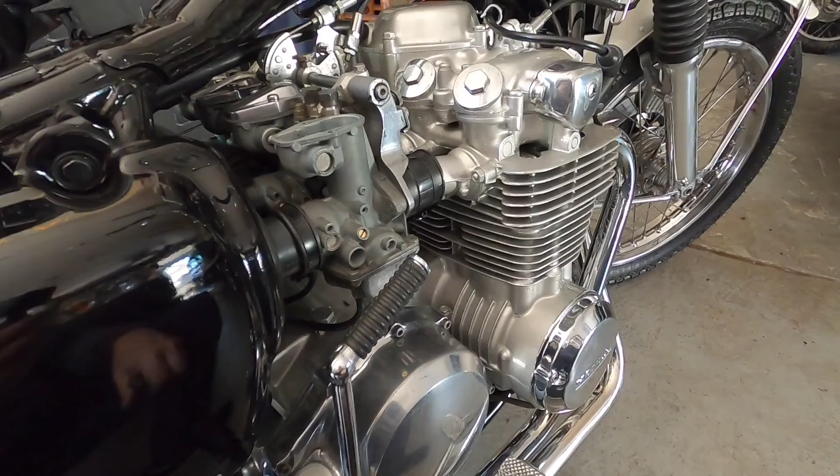Well, I've been working on the bike trying to get it going good. I put a new points condenser in, set the gap, set the timing spot on, and checked the centrifugal advance for proper advance. It's advancing correctly for the RPMs.

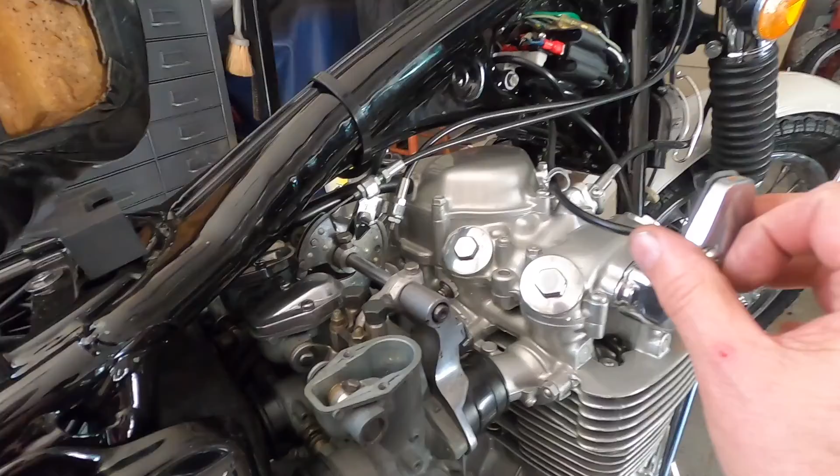It's just running too rich and it's stalling because of it. When I come to stops and stuff and just cruising along, it's blowing black smoke and running rich.

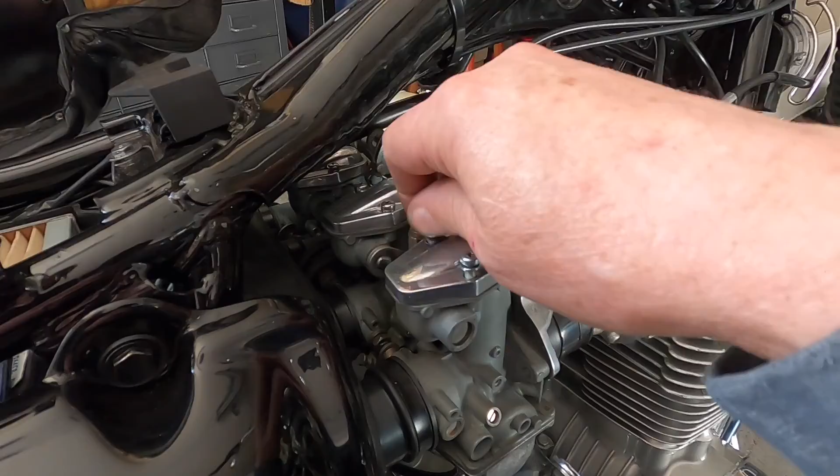So I figured out you can change these metering rods without pulling the carburetors. So that's what I'm doing. I just changed this one, lowered the rod one notch. I'm going to do them one notch at a time and hopefully get the engine running somewhat good so I can ride the bike.

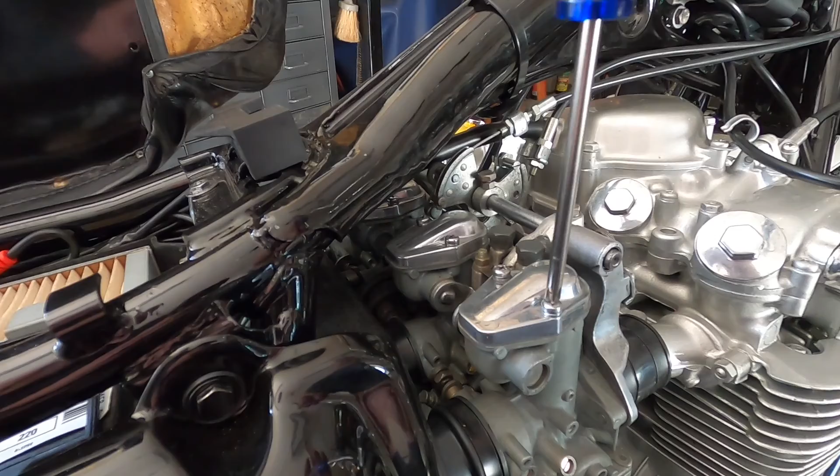I mean, I can ride it, but my problem is it just stalls when I come to stops, and it doesn't run good cruising at low speeds, and doesn't backfire or anything. It doesn't seem to be running lean. It seems to be running rich. So that's where I'm at.

So we'll just go carb by carb. Hopefully I can get this out with the frame there. May have to get a different screwdriver for that screw.

Let's see, I got a little ratcheting one here. Let's see if this one fits in there.

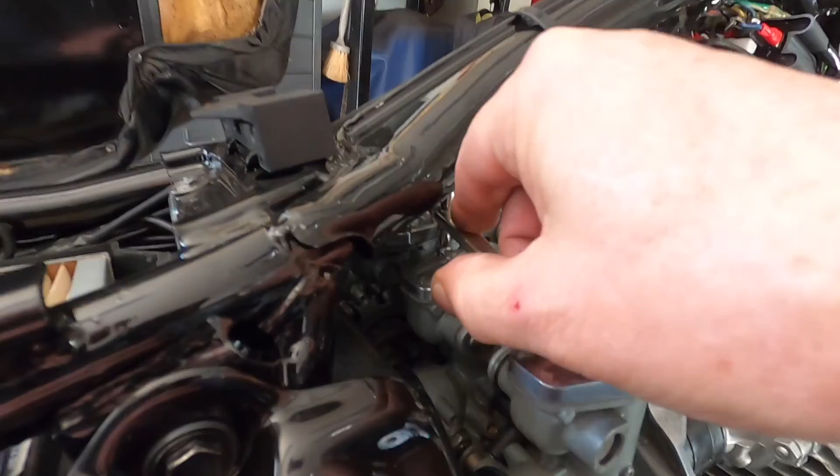We're just going to plug away at it and see if I can lower all these down, one click at a time, and then we'll start the engine and see how it runs, and hopefully it eventually runs good, and I can get this thing to where I can ride it.

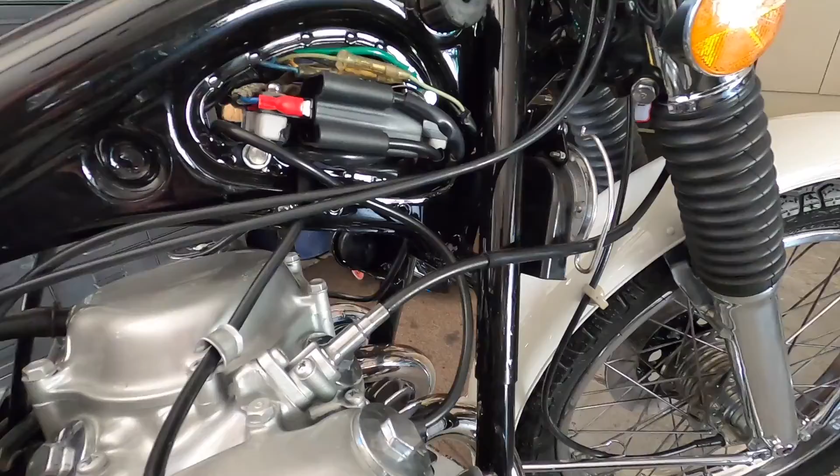It's not ignition, like I say. The points, the coils are new, the plug wires are new, the plug ends are new, the plugs are new. It's firing on all four.

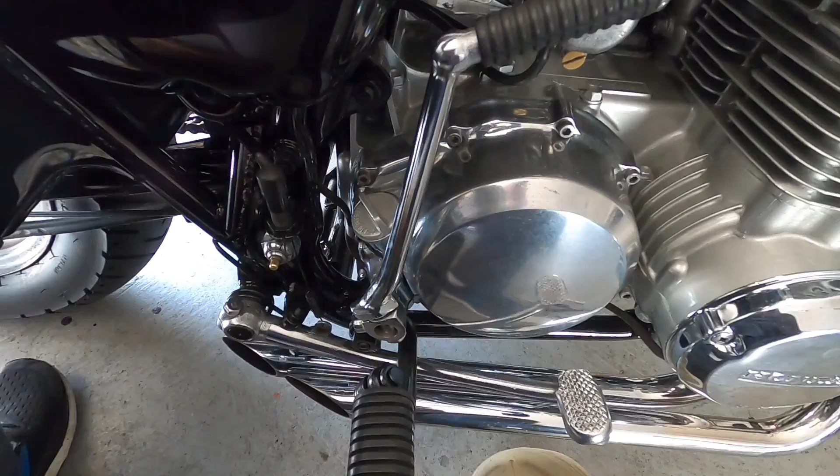Does sound like it's missing a little out of the exhaust, but I think that's because it's running rich. You give it some throttle, it really blows black smoke, so that's why I'm thinking I got to adjust it.

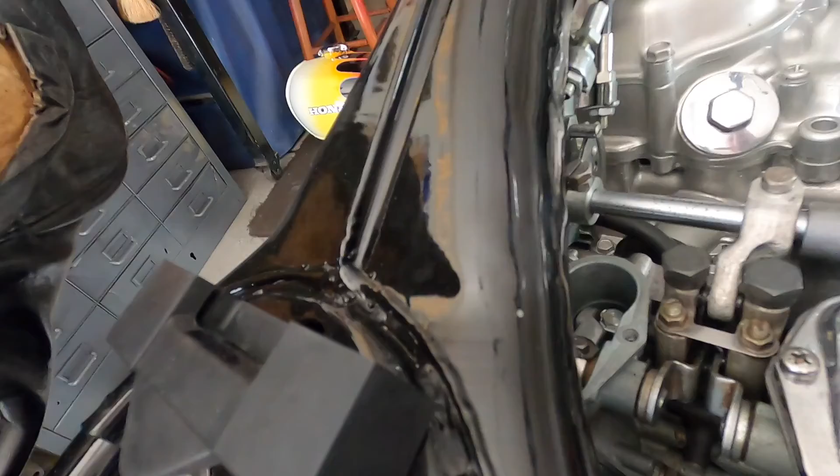Then I can undo it, I gotta bend these little tabs. Oops, I have a magnet here that's sticking to everything. So I bend those little tabs back out so I can get a socket on the nut.

Might need to get a little tiny screwdriver. Hang on, let's see if we can't get these bent back over.

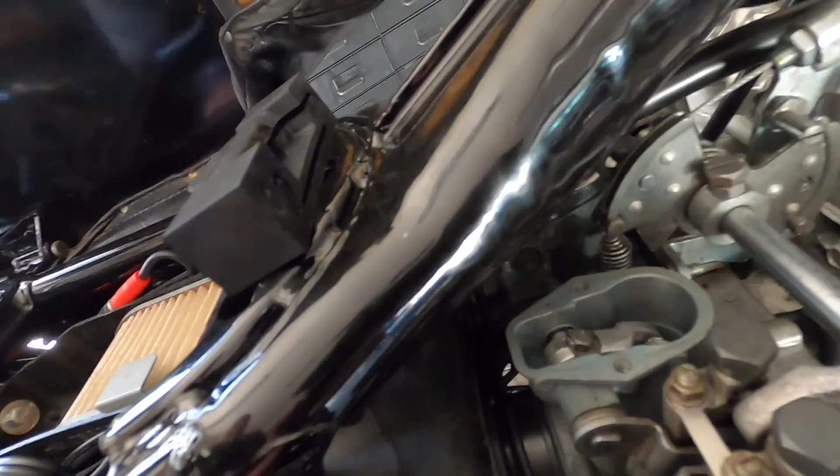And I'm not bending them back, I'm just leaving them open. Once I get everything, I think, to where I'm happy with it, then I'll go back and bend these tabs back up like that. I should have just left them when I put it together, but I thought it would be okay.

All right, let me just get that thing off. Hang on, I need both hands. I can't hold the camera and do it.

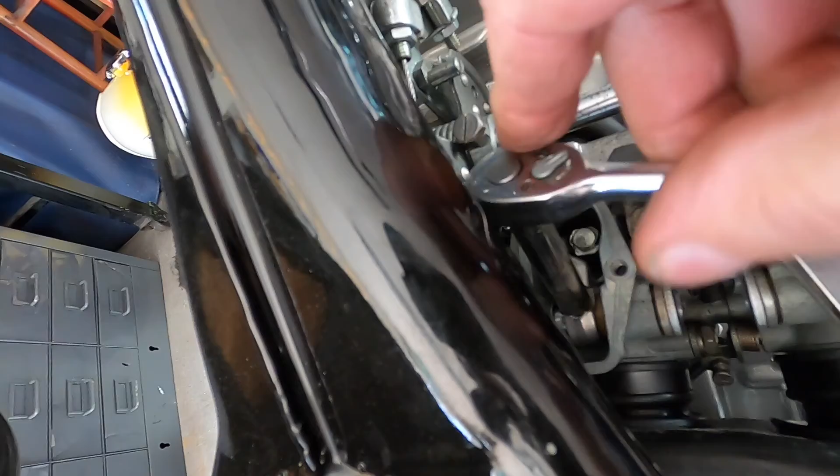All right, I get that little tab bent away, and then I can take this bolt out. This holds the arm to the throttle shaft.

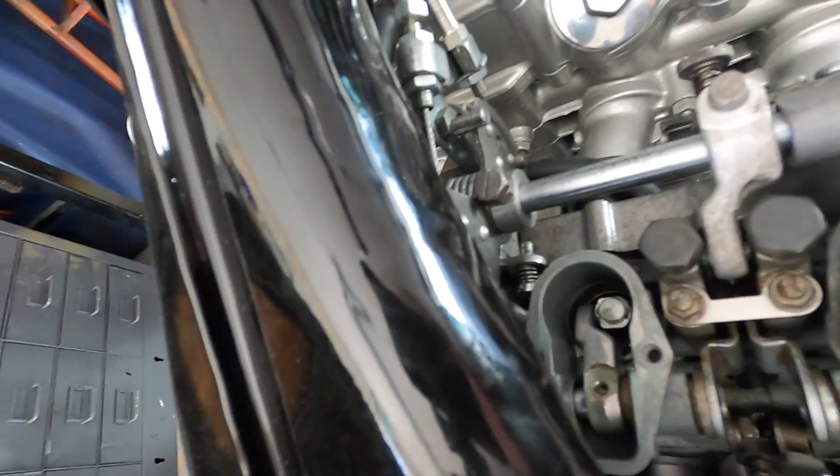And now that throttle shaft moves freely in there, as you can see. And I can pop this out after I loosen that, and then just lift this straight out. So let me bend those ears, get that loosened up, and then I can pop it off the shaft.

I might be able to pop it off without loosening. Yeah, there.

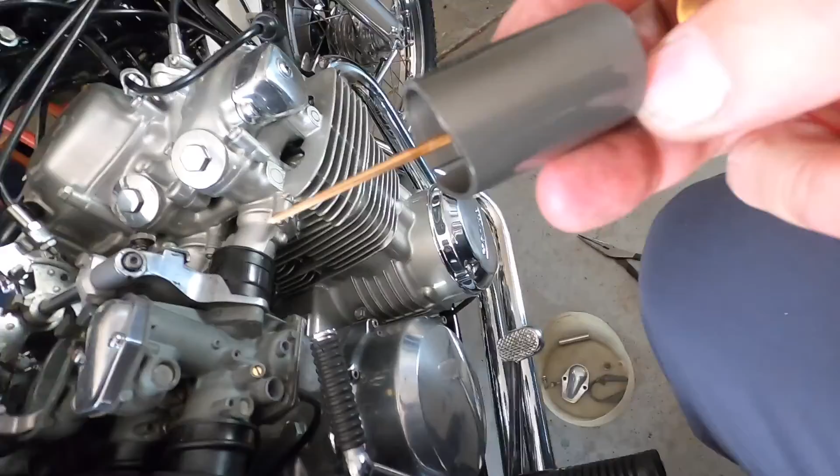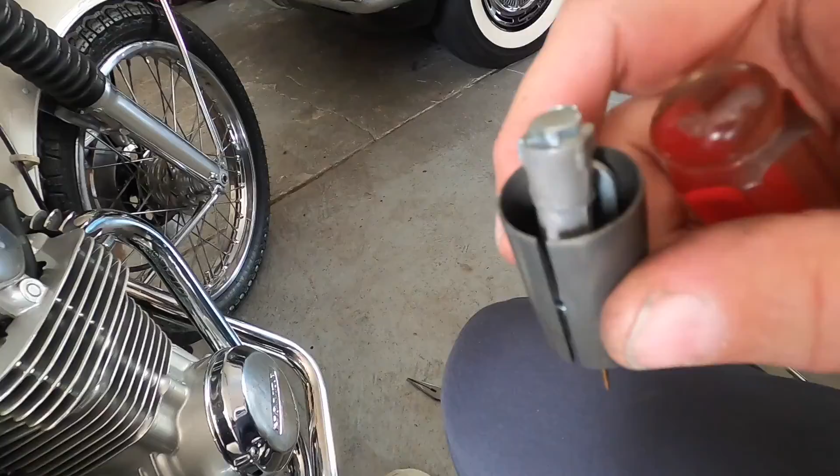So that's the rod I gotta lower. That's the metering rod, and there's two screws down in here you take out, and then you can turn this inner piece. I don't know if I can show it in the video or not. Let me go over to my bench and set the camera up on something here.

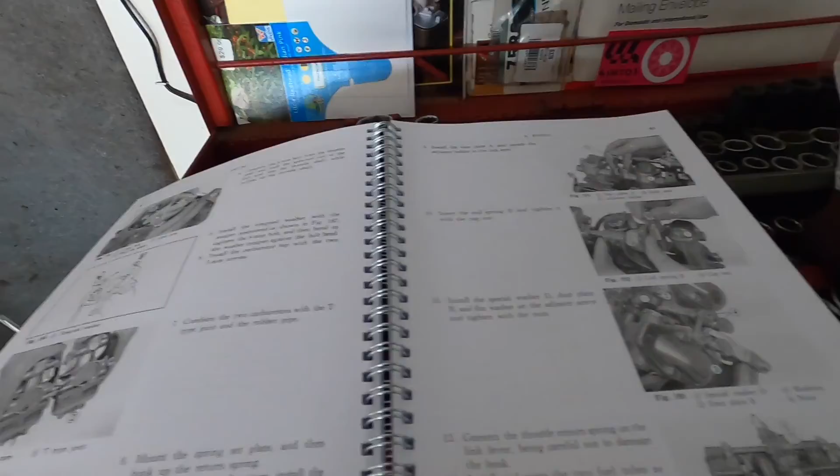I've been kind of keeping track of the numbers. That's the number, that's the throttle valve, correct number for the throttle valve. That's the number on the metering rod, I don't know if that's correct. The service manual doesn't really give you a lot, these are the only specs it gives you.

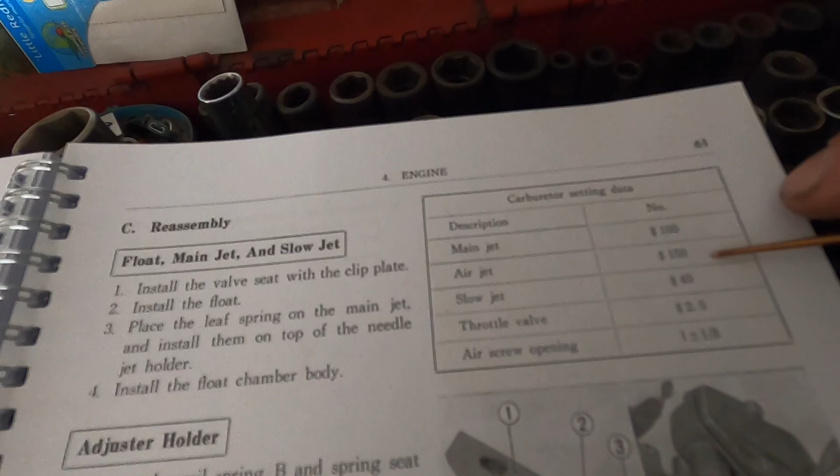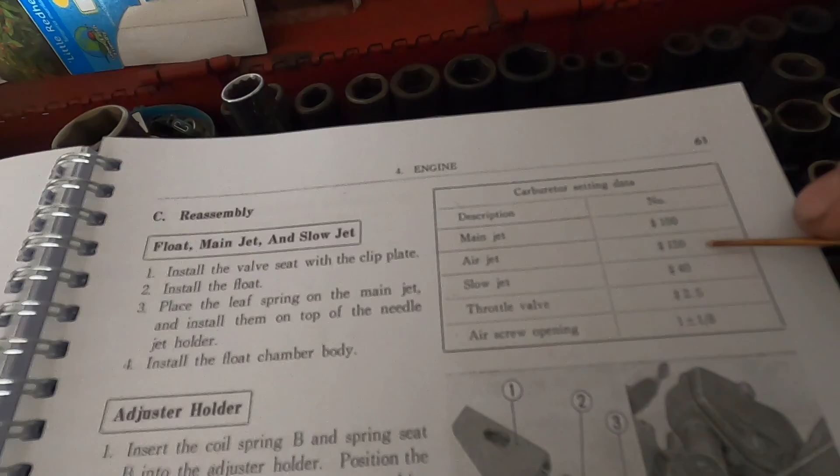So that's the main jet, which the bike has. The air jet, that's what the kit came with, that's what the carb kit came with. And it flooded out so bad, the air jet was, you could physically see, was larger, and these were slightly larger too. But it idles really nice with those jets changed out to the ones that were in the bike.

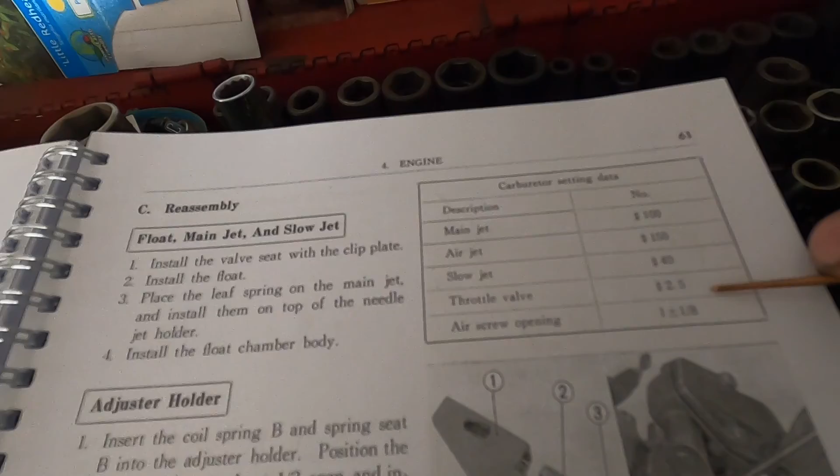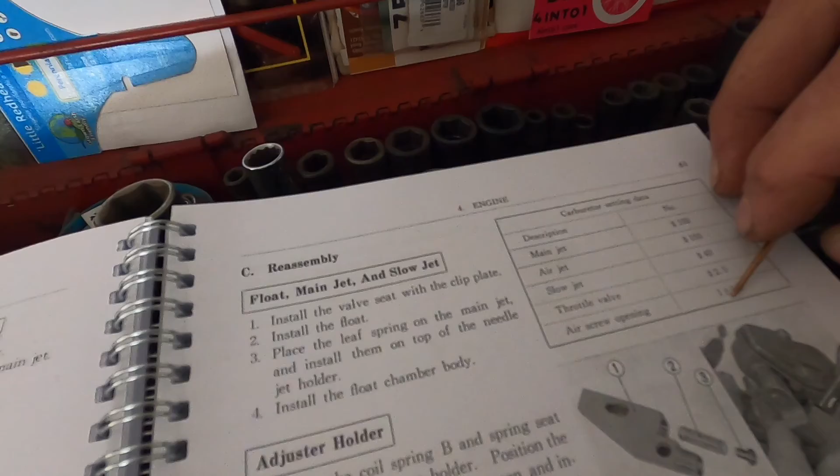That's a 2.5 throttle valve. That says 2.5 in there, so it's a correct throttle valve. And then it gives you the screw opening, which is the screw in the carburetor, which I had at 2.5, and it says 1 plus or minus an eighth.

So I don't know. Anyway, let me get these screws out and I'll show you what you do. Hang on. All right.

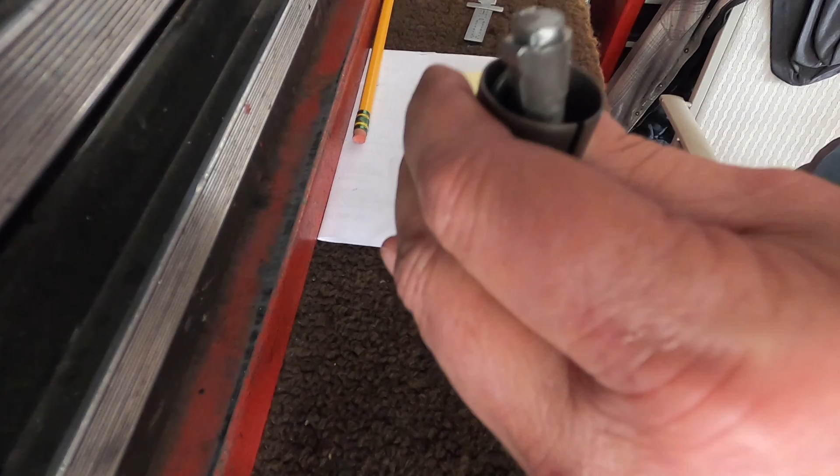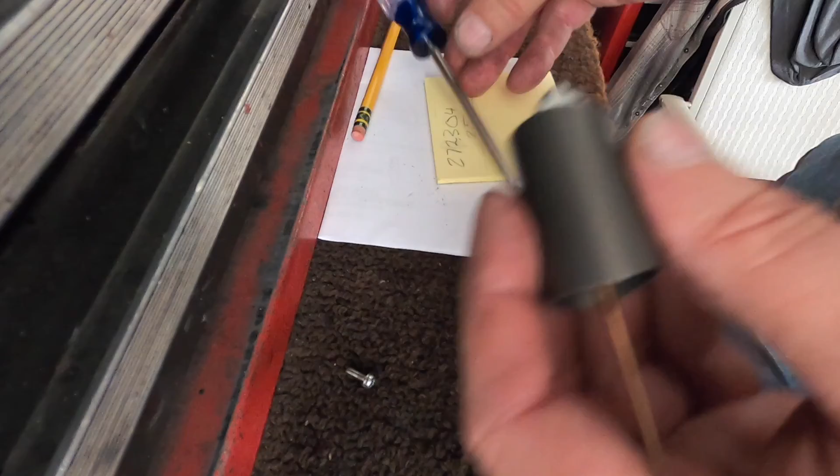Guess the screws aren't falling out. One of them's still hanging up in there. There we go, both screws are out.

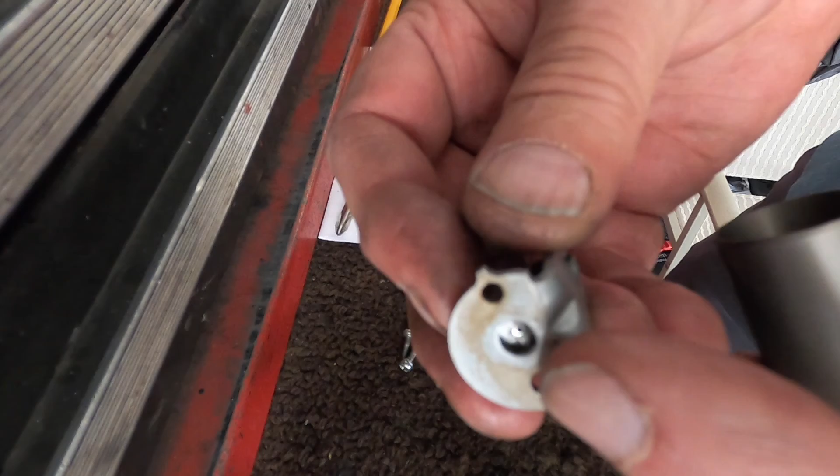And you turn this, see how it's got a groove there? You turn it until this little slot lines up with the groove, and then it comes out, and then you can take your metering rod out, and that's the clip.

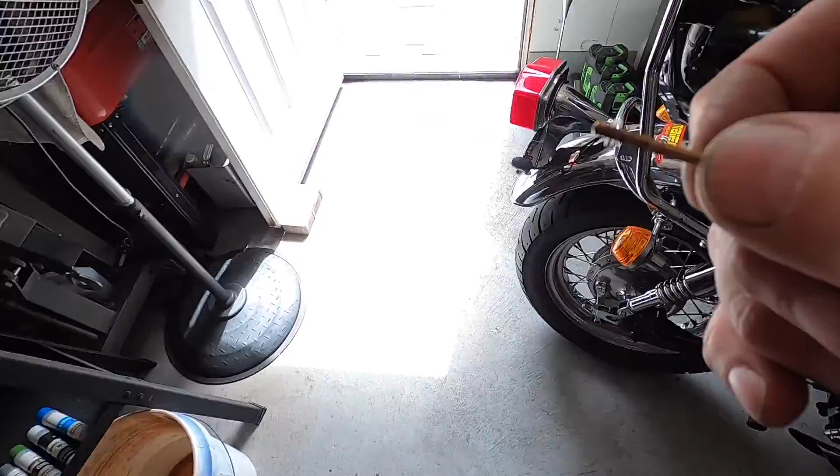I don't know if it shows up or not. Let me take it out in some light. That's the clip. There's a bunch of grooves on the metering rod. I don't know how that shows up, but it's in the next to bottom one, which is really rich, and I'm moving them up one notch at a time.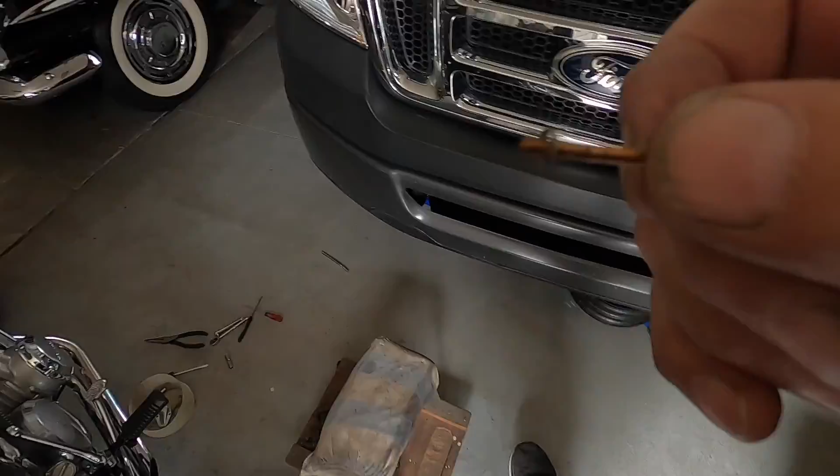I'm only going to go a little at a time, see if it improves the performance of the bike. And you know, I got to do something. If I turn the fuel valve off and let it sit there and run, after about 15 seconds it really runs nice. It shallows out the fuel level.

But anyway, I'm going to pop that clip off, raise it up one. I'm doing that to every one of the carburetors, and then we'll see how it runs again. See how that's one click down.

I don't know if you can see those numbers right there or not, but those are the numbers I'm looking at with a magnifying glass and writing down. Make sure all 4 of these metering rods are the same.

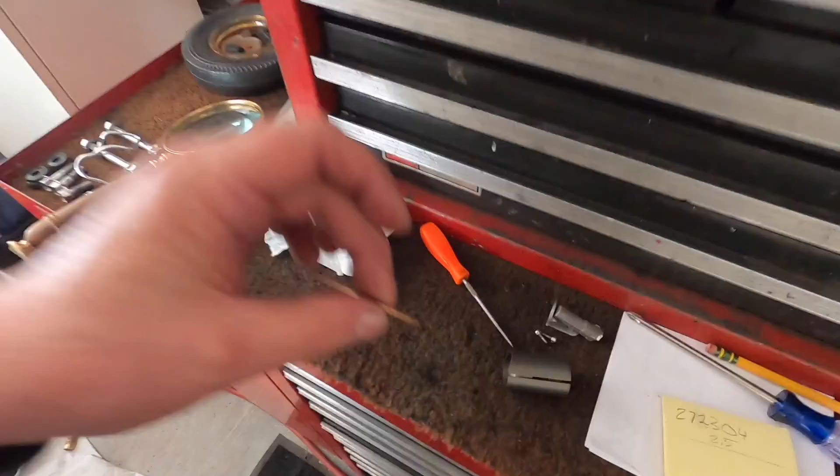Yeah, it'd be nice if they just put adjusting screws on the carburetor to where you could just turn them in or out to get the performance and not have to sit here and monkey around changing things like this to change the mixture, but that's just the way it is.

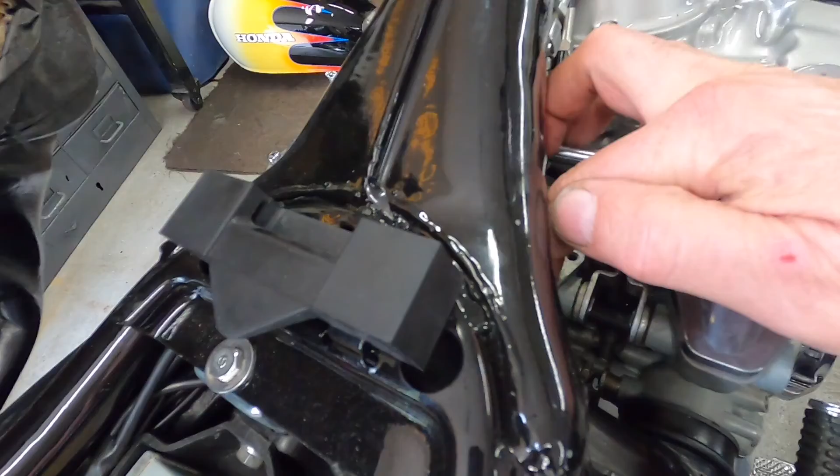Now I just dropped the metering rod back in. You can see I'm leaving those tabs pulled out until I get things right. I snugged up these, but I'm not going to run it a lot until, you know, I mean, I'll run it.

And if it doesn't run good, I'll take them back apart and change them again. If it runs worse, I'll go the other way. If it runs better but still not good, I'll go some more, but there's no point in keep bending those.

I'll fatigue it, so I'm just going to put the tops back on and we'll just try it out, and when we get it right, I'll pop the tops off and rebend these things. No big deal. Got another one done.

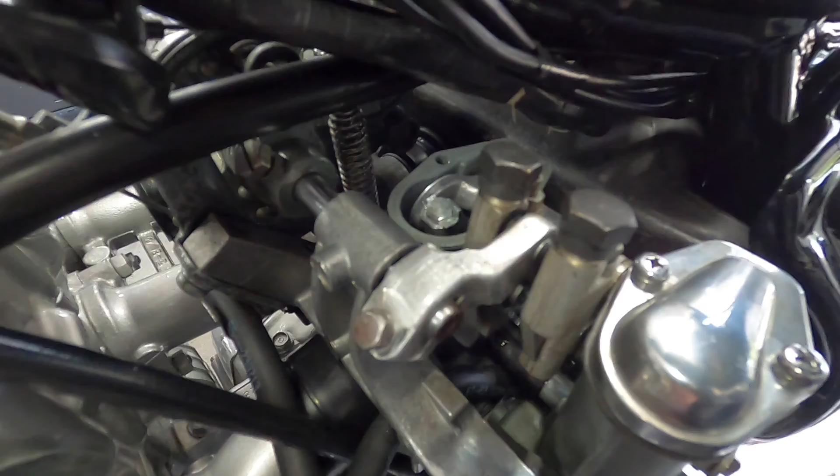Let me put the top on that carburetor and one more, and we're gonna test it out. It's kind of a pain to do this, but it sure beats having to take the carburetors off, that's for sure. All right, that's gonna drop down in there, so let me get this together.

I need both hands, and then we'll button this up, put the tank on, and see how it runs. It's starting to cool off, so I don't know if I'm gonna be able to go out and ride. It's getting cold out. It was warmer earlier when I went to take it out and found that it just didn't want to go, so doing the same thing.

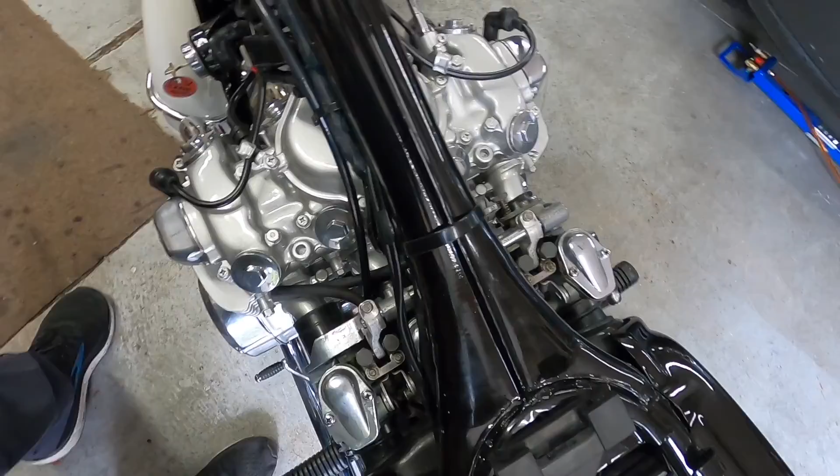So it wasn't the points condenser after all, I think it's all carburetion. All the metering rods are up one notch now, everyone's done. Wouldn't you think raising those rods would make it run more lean? But it's not, it's running way richer. I don't know if I did something.

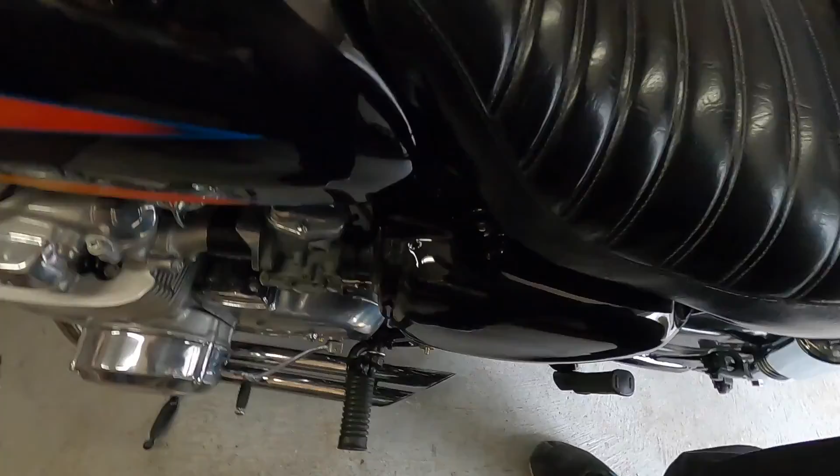See the black smoke coming out? I don't know.

And it just loads up more and more as it sits there and then eventually stalls. It definitely made it worse, whatever I did there. So I don't know, I'm kind of at a loss. Usually moving those rods down leans it out. Maybe I'll take it apart and put them all the way up and see what happens. It's a bit of work to do that, so that might happen another day.

Another thing I might do is shallow up the floats, because what really helps is when you turn the gas valve off and it runs a little bit.

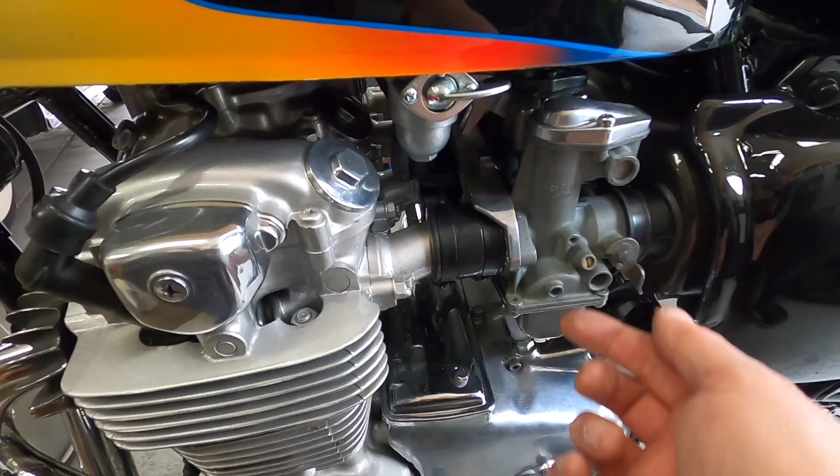And the float bowls are like 20 millimeters. They're supposed to be 22. I think I might take one of these out, put a clear hose on and hold it up and see how much fuel is actually in the bowl.

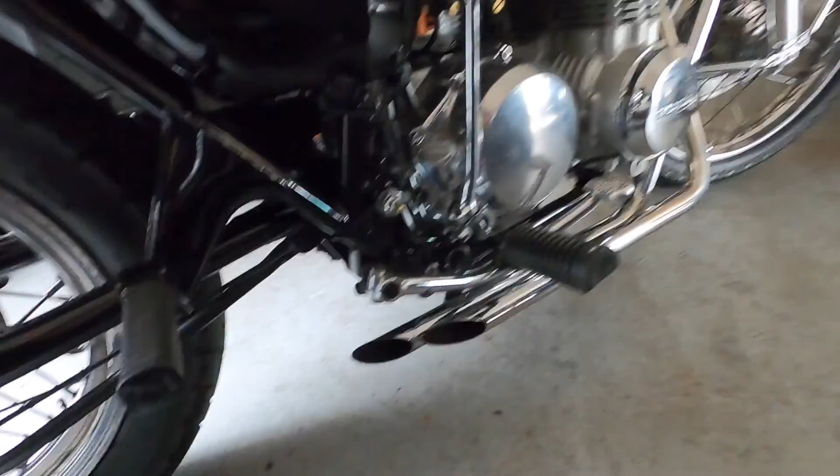I took it out for a ride on the road, and it's just completely dropping a cylinder here and there. It's like it's ignition. See, cylinders are picking up and dropping off right now. So I think I'm going to check voltages at the coil and just check everything, see if there's low voltage running somewhere.

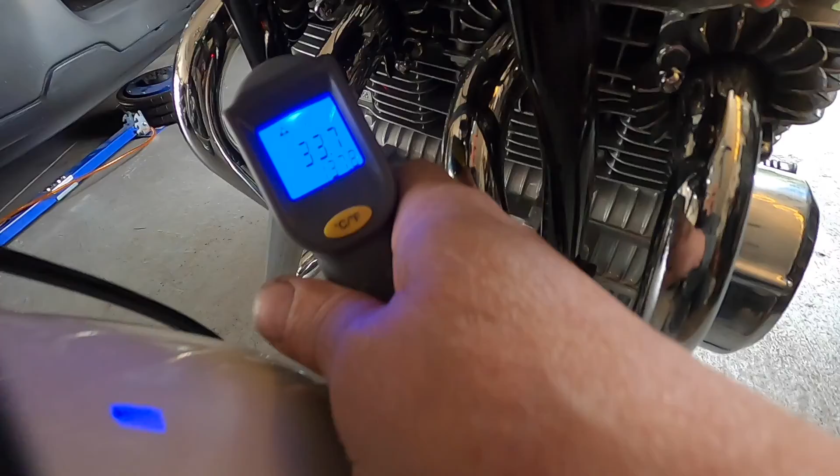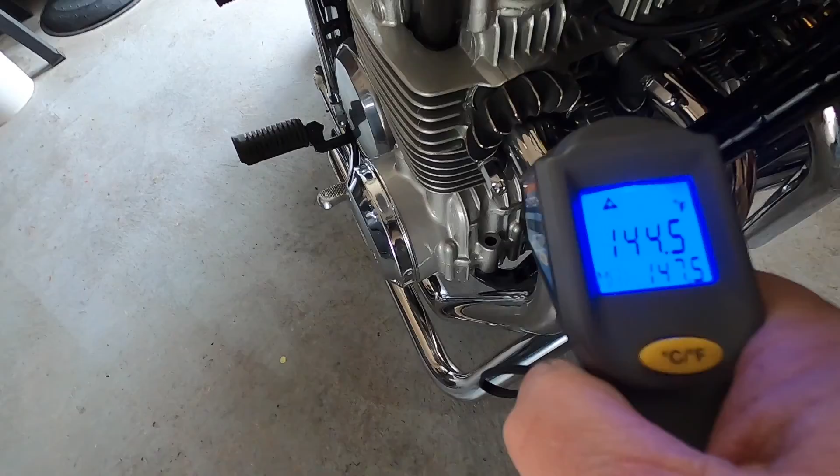Pretty close to the same temperature, but there's definitely an issue with, there's definitely a miss or something. You give it the gas, and I mean, you stab the throttle and this thing will absolutely get up and go, and it doesn't backfire when you decelerate.

And yeah, I'm thinking I'm going to start looking more at the ignition again before I do more carburetor work. I'm going to check voltage at the coils, make sure that I got 12 volts to the coils.

Make sure everything in the ignition circuit, and this grip, I don't know how many times I've glued this thing on, it just keeps coming loose. I used what everyone recommends, and this is what I used, but it doesn't work worth diddly. So I'll have to find something else that'll work on that.

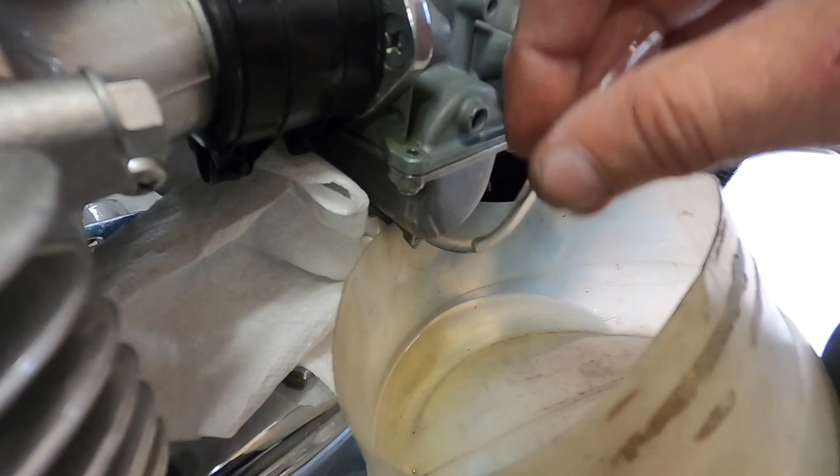I was trying to show how I check the float level. So you get the clear hose in there and turn the gas on, and it should be not higher than that joint.

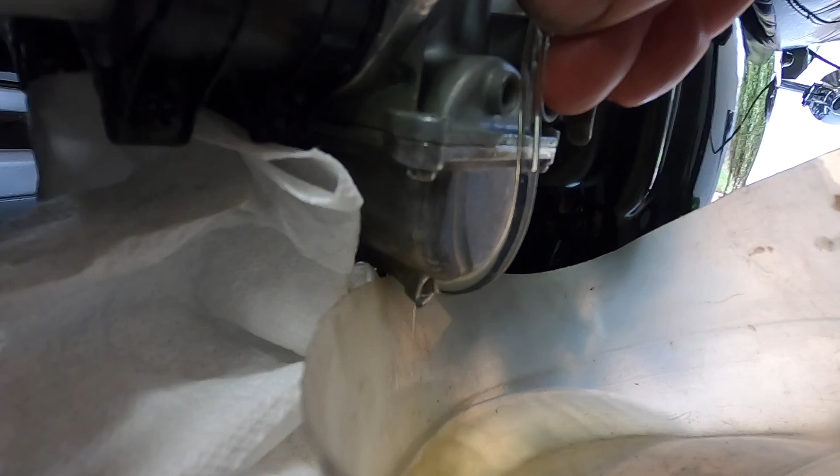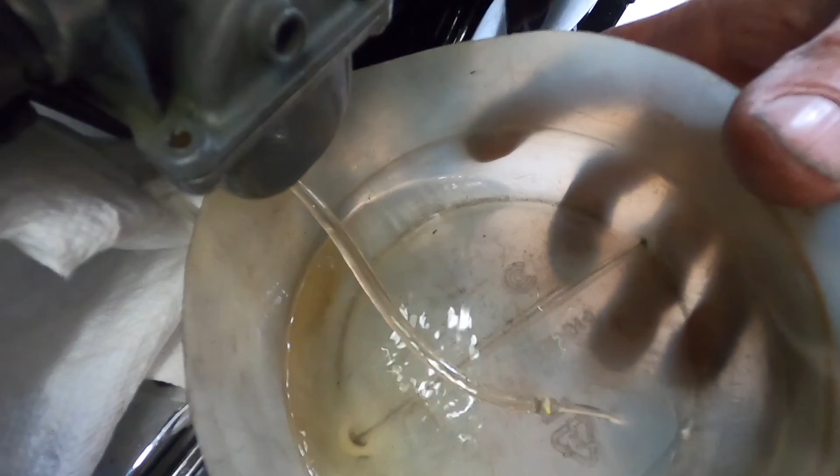So the float level is good. You see how I move it? It stays. The bike's leaning over a little bit on the kickstand, but yeah, I don't think that's out of the norm for a float level. I think that's all good. We'll let the fuel drain out before I move my dish here.

Alright, so I guess I'm going to check voltages. The battery's down a bit from all the cranking and starting it and stuff, so I got the battery on the charger right now.

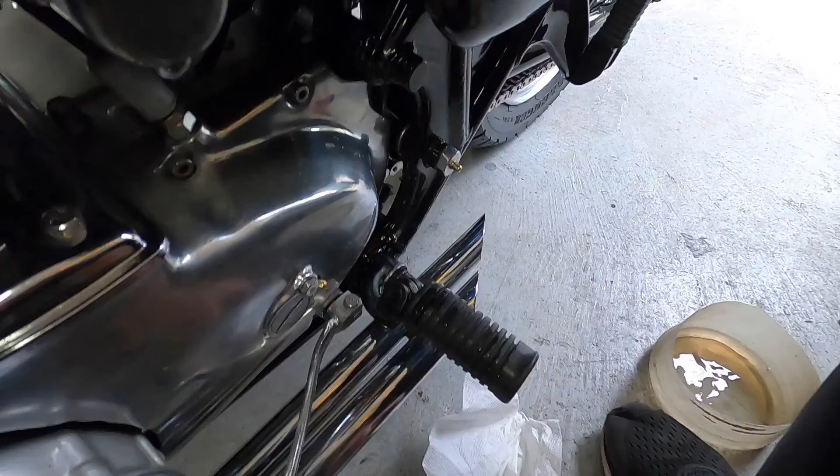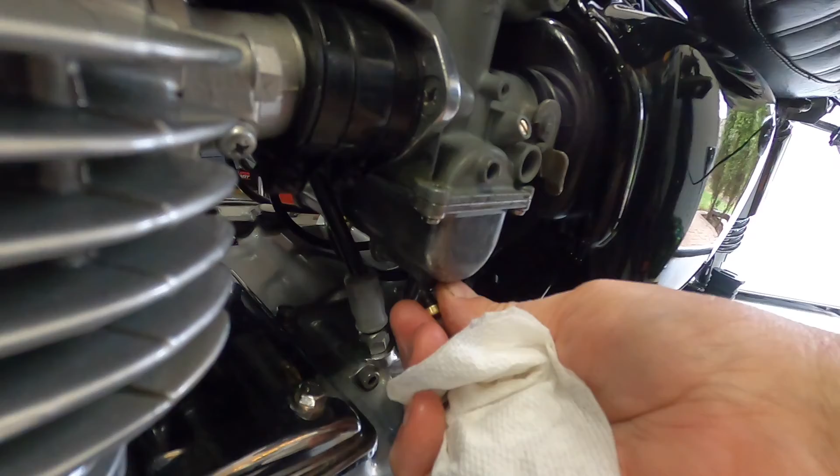But yeah, I don't think all the floats are set the same, but they all should be pretty good, like right in that area. So I don't think it's the float levels.

I don't know what I'm gonna do. Seems like the more I work on it, the worse it runs. And I might have to put those metering rods back to where they were, but first I want to check the ignition system out. It's like misfiring, dropping a cylinder, so I don't know what the deal is. We'll horse with it some more.

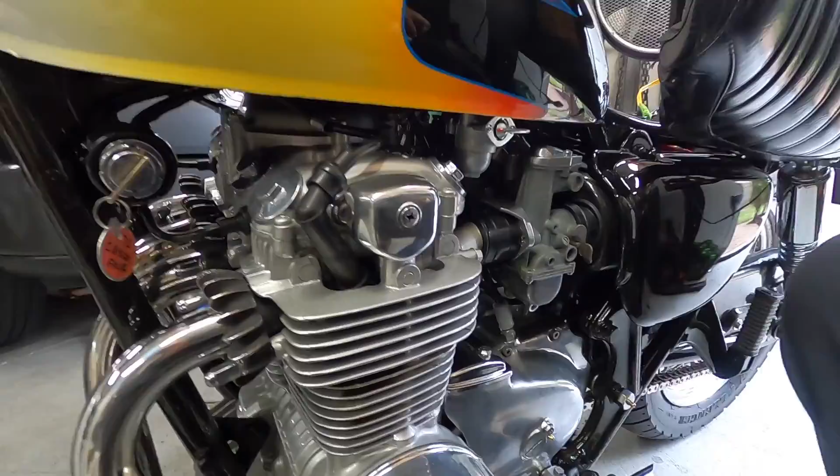So as I stated, I put new points in here because I felt like it was an ignition problem. It felt like cylinders were dropping off and picking up and dropping off and picking up. Usually when you have a carburetor issue, they either run rich or they run lean. They don't drop off and pick up, drop off and pick up.

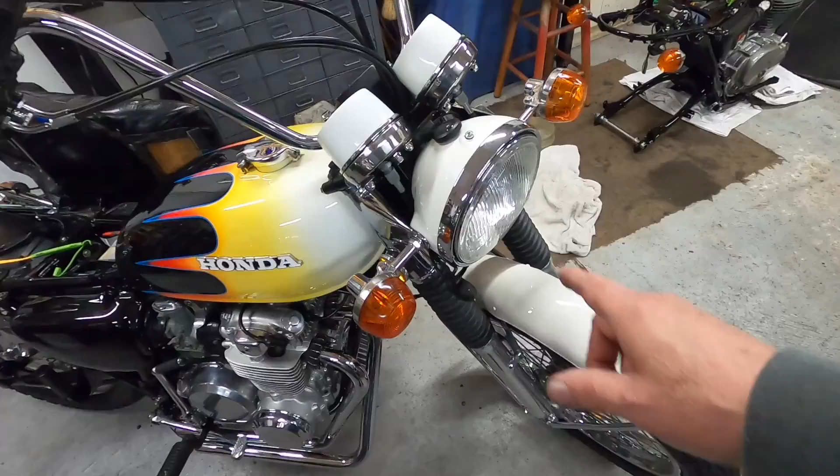That's why I put points and condenser in it, and it's doing exactly the same, actually a little bit worse, but the timing's right, everything's set perfect. It was running really good when I first started it with the points and was setting the timing. But as it was running, it was starting to run worse. And then when I took it out for the ride and I turned on the headlight, it really ran bad.

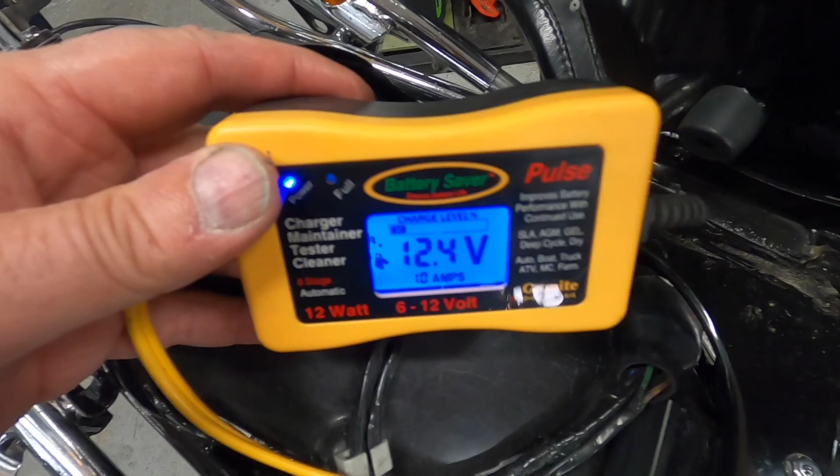So I'm wondering if it's a low battery that's causing it. Yeah, the battery is surprisingly down. It had 11 point some volts when I started charging it.

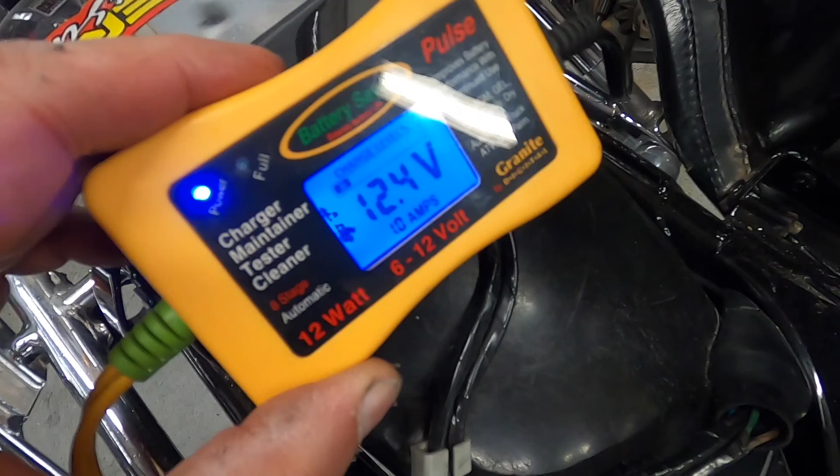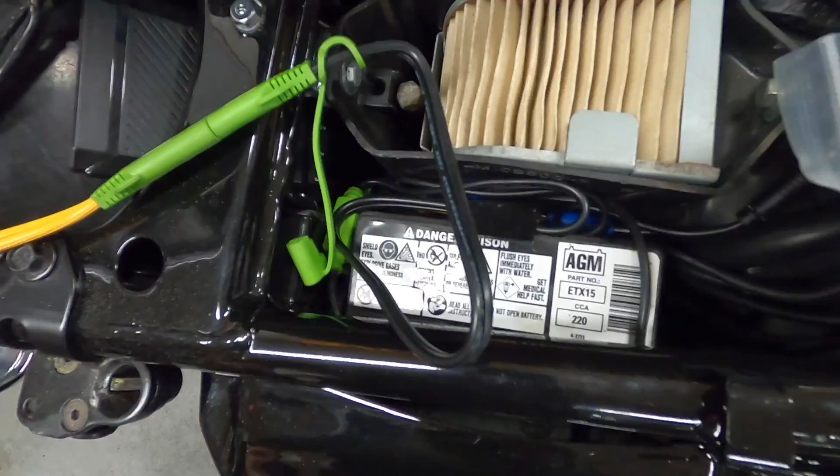Maybe the charging system isn't working on the bike, so I cranked it up, and yeah, it is charging. But I think it's because I haven't brought the battery up in quite a while, and it may be a bad battery - that's the battery that was in the bike when I bought it. So anyway, we'll charge the battery.

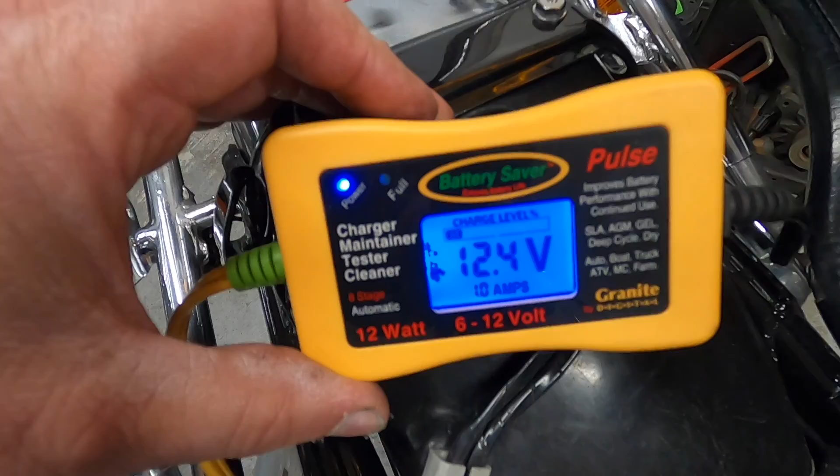I can't check voltage at the coils with a pretty low battery, so I'll let that charge overnight, and tomorrow I'll check voltages at the coil. We'll crank it up, and if it runs good with the battery fully charged, I'll check the charging system again. But if maybe the battery's no good, I don't know, but it definitely doesn't seem like a fuel problem.

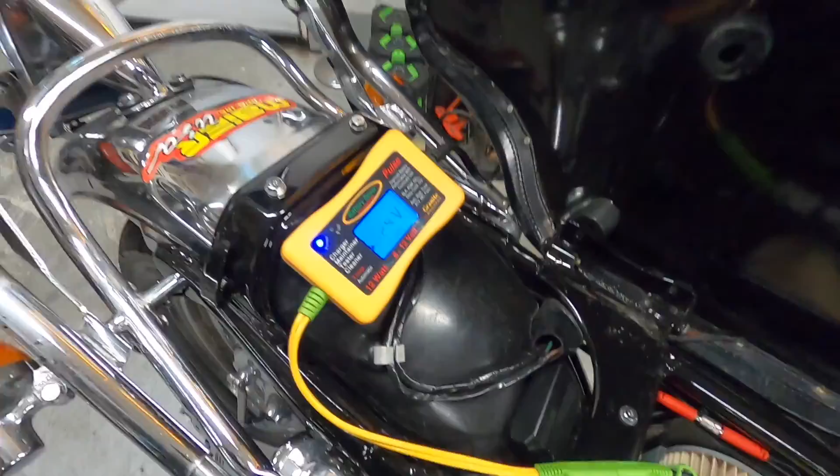It seems more like an ignition problem. It's still blowing black smoke out the exhaust a little bit, but that could be because of a weak spark or something too. So anyway, let me get the battery up, and we'll fiddle with it a little more and go from there.

I put a voltmeter - you can see the terminals there and there - and it was charging. It was like 12.8 volts when I was running at about 2,000 RPM, probably because of the amount. It's probably charging at its full. I think it's a 1.5 amp alternator, so it's probably charging at full output.

We'll get this all charged up. It's supposed to be cold tomorrow, so I probably won't get it out and ride it, but we'll get this charged up, and you'll see in the video I'll check the power to the coils and make sure, wiggle the wiring and everything to make sure there's no issues with the wiring on the bike, because with new points and condenser and the timing set with the timing light, everything's spot on.

Points are 14 thousandths. Timing is spot on, the F mark on both cylinders. I gave it the throttle, and the timing marks come to where they should for full advance at the correct RPM on the tach. I don't remember what it is now without looking in the shop manual, but it was spot on. So I'm pretty sure that all that ignition stuff is good.

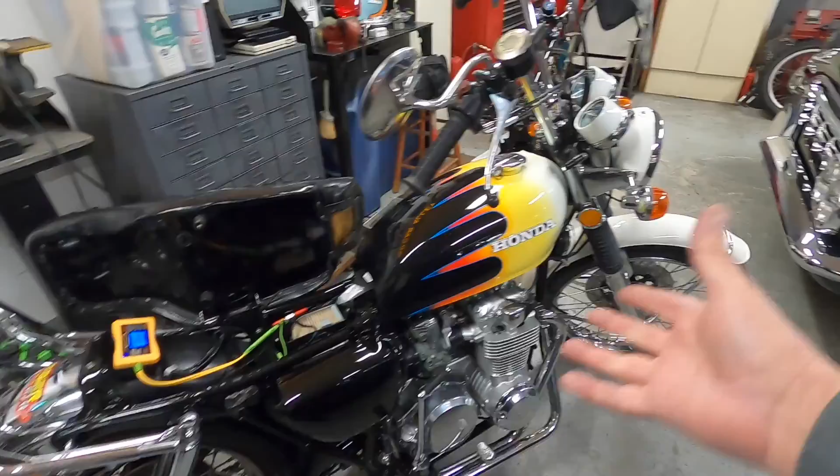I've been cranking it, and I put the camera on it and was working lights and doing all that stuff. So that probably ran the battery down a fair amount. And then I haven't really ridden it.

Really got to get the RPM up around, you know, preferably 3,000 RPM to get the charging system putting out its max. At idle, it's probably putting out nothing - probably draining the battery from the lights running at idle. So, you know, these bikes just have a 1.5 amp alternator, what can I say, and that's rated, I think, at 2,500 RPM. So it's going to take a bit of riding to keep the battery charged up.

And I've put now 2.5 miles on it. Somebody was giving me the business, and I only rode it 1 mile and 7/10, but it was wet and rainy and it wasn't running right.

I just wanted - you really can't just sit here and let it run in the garage or park. You need to put a load on the engine and run it a bit, so if it's loaded up from idling, it cleans it out. And you need to run them on the road to really tune them properly, or if you're lucky enough to have a dynamometer, which I definitely don't have.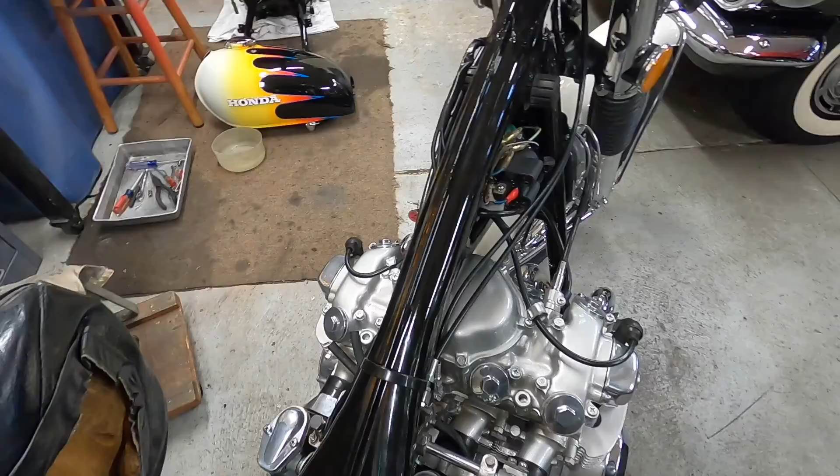It took overnight to charge the battery. It was really dead, but I just checked the voltage at both coils on the black with white, and they're both 10.36 volts, so there is a resistor. And I got 12.5 volts at the battery, so I'm assuming that it's a resistor.

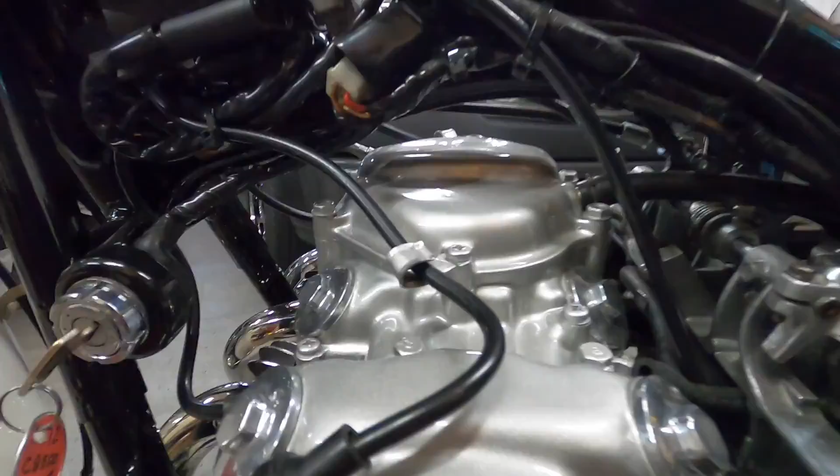I wiggled all the wiring to see if it would change, wiggled connectors and checked grounds and everything, and made sure the engine had no bad ground. I actually grounded the engine directly to the battery, and that made no difference. So I think we're just running a resistor through the system here to, I guess, help save the points. Well, it didn't make any difference.

Charging the battery.

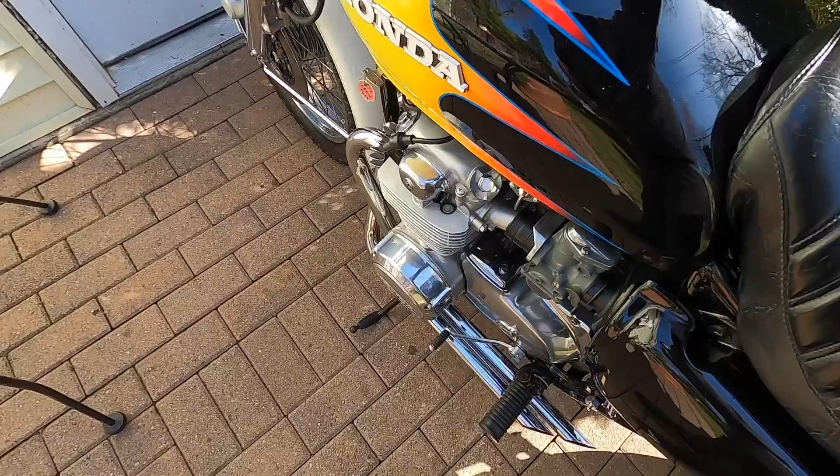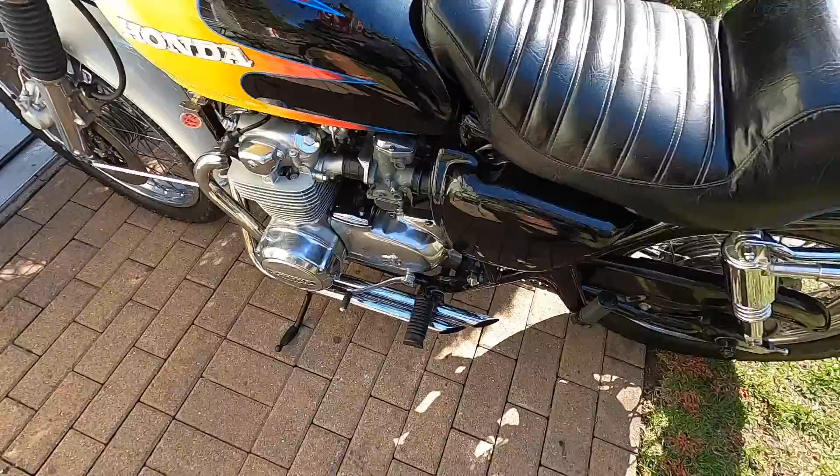I think I'll put those metering rods all the way the other way, one click so they're at the bottom. Try it, I have nothing to lose. It runs worse now than it did before I raised them up one click. So let me put them down and see what happens.

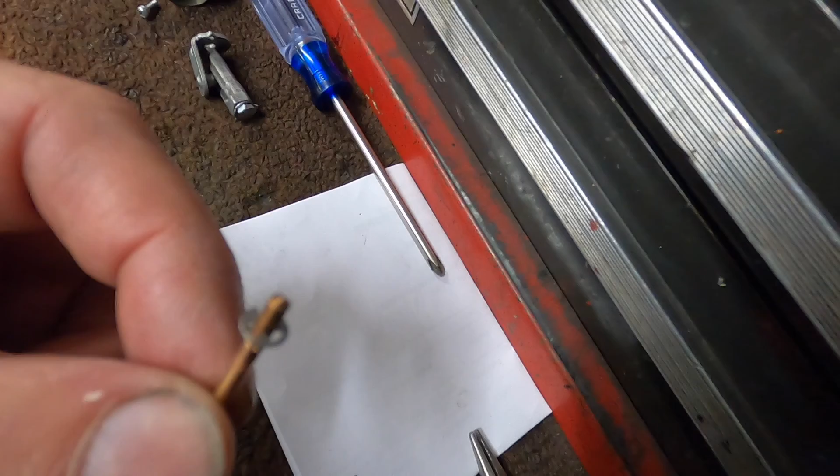Trying to hold this so you can see it, but I moved it the opposite way, so it was one click. When I just ran it, it was 2 clicks above the bottom where it is now, and it ran worse moving it up one, which lowers the rod down into the jet so it leans it out. Clipping it down further raises it up out of the jet so it richens it up.

It would have been much easier if they had a screw you could just turn to adjust the carburetors, wouldn't it? But they don't. So anyway, we're gonna try setting them all there and see if that improves the performance. If it doesn't, I'll put them back where they were.

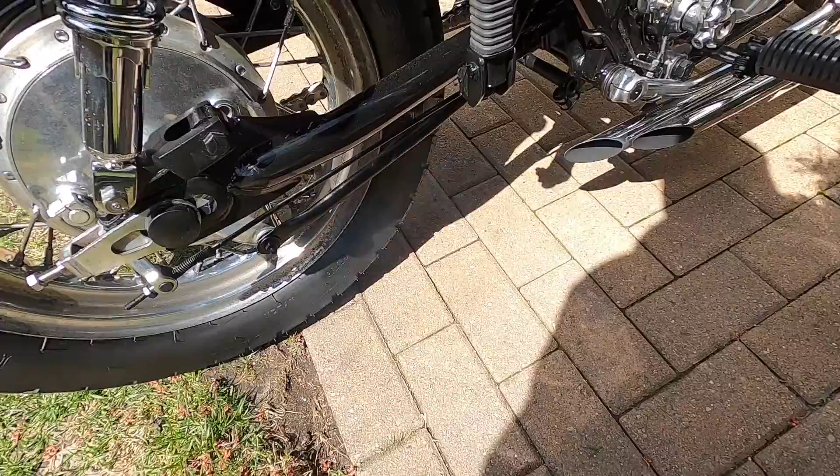Back to blowing black smoke now. I don't know if that shows up or not, but it's pretty black.

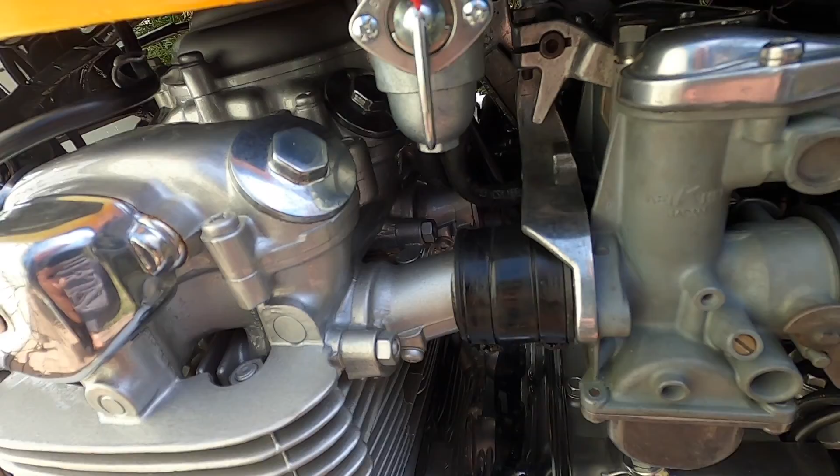And I checked for vacuum leaks. I took some WD-40 and sprayed it all around the manifolds here to see if I had a vacuum leak on both sides, and sprayed it around these, and no vacuum leaks appear to be anywhere. Sprayed it all around everything. So anyway, I'm gonna give up for now and do some yard work and fool with it another day.

Turn the gas off. As the carburetor is burning out, it starts running better, when it's starting to run out of gas.

It's definitely a fuel problem. It's not ignition, because when it was missing and stuff, I was putting my timing light on each wire and the light strobe was firing off fine each time.

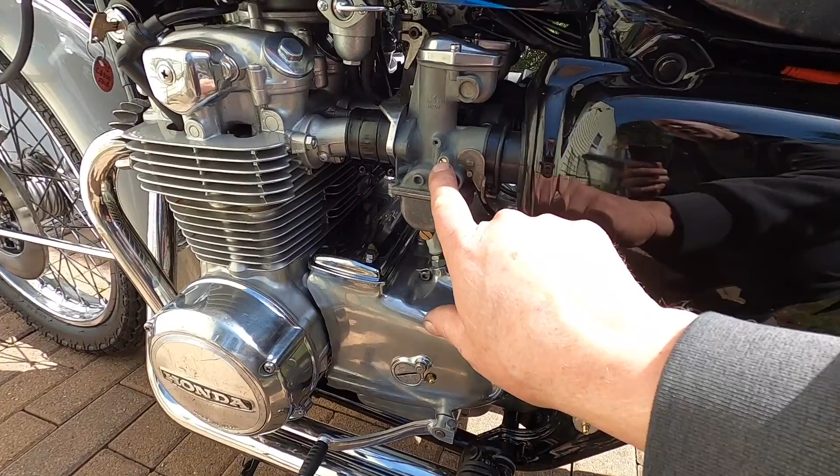So we've got a fuel system issue, and I don't know, these are the bigger air screws. Maybe I'll put the smaller idle jets back in that came in the rebuild kit. I don't know, I'll fool with it some tomorrow. I've got to do some other things today. I don't have time to spend the whole day on it again, I already spent one full day horsing with them.

We'll fool with it another day. Maybe some of you guys will have some insight on what I'm doing wrong. I'll post this video so you can see it, and then I don't know, we'll go from there. See what we can do to correct the performance issue. It's kind of aggravating, but you know, that's part of fixing things up like this. So let me put it inside so I can do some yard work around the yard.

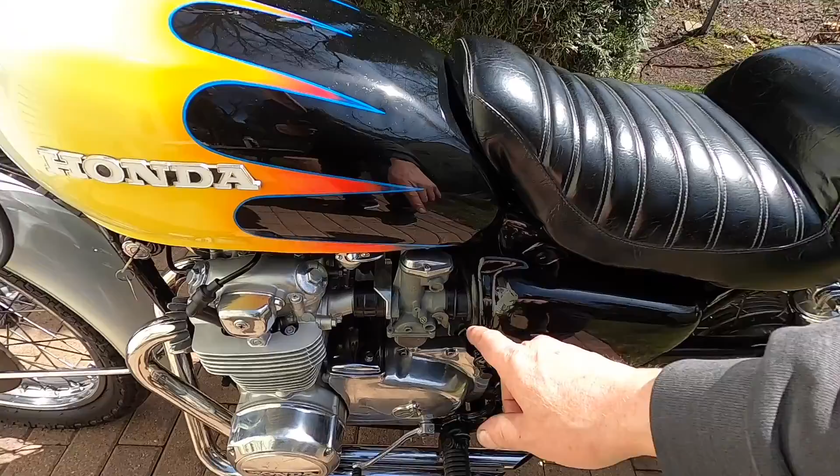Tomorrow it's supposed to rain all day, so I think I'll set these back to the original clip where they were, because it ran the best where it was. So tomorrow I'll set that back to where it was, and like I say, I'll change those idle metering jets.

Because once you get the RPMs up in this thing, I mean, it goes. When you're out on the road, if you lay into the throttle, this thing really goes. It's low speed, under 3,000 RPM that it has trouble. So it's something in the idle circuits. Maybe there's something - I can't imagine all 4 carburetors have something blocked up, but it's all 4 carburetors, all 4 cylinders that are blowing black smoke and randomly misfiring. I think it's because the mixture is either too rich or too lean.